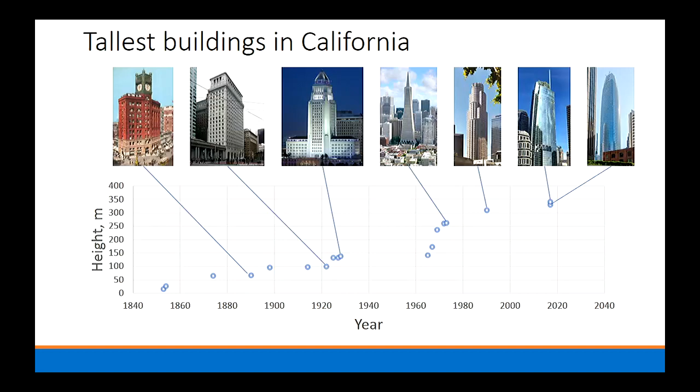Now, today we have tremendous power in computing, tremendous knowledge in the response of structural components that helps us design our buildings. We'll show some of that. If you go back into the 1930s and so forth, the designs were really based on very simple hand calculation kinds of methods.

I wanted to bring out an old book that sits on my shelves at home by Hardy Cross, on continuous frames of reinforced concrete. That's Professor Cross from the University of Illinois. He devised this method known as moment distribution.

How many of you have been taught the moment distribution method? Quite a few. I'm not sure whether in the classes today the young students are getting that method. It's a very powerful tool, a very powerful way of thinking.

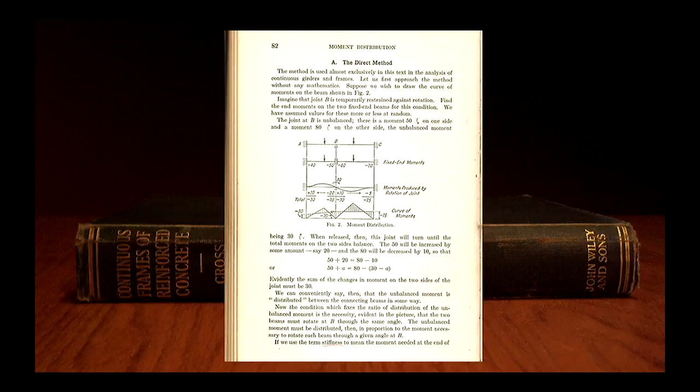So Hardy Cross really had a lot to do with being able to analyze buildings back in the 30s. He also had some other funny things that he wrote. This is another book that collects some of his writings from the 1950s, and the writings go back into the 40s. He wrote about standardization.

And what he wrote is peculiar. It says: as the size and complexity of projects increased, it became desirable and even necessary to set up a series of routine procedures for analysis and design.

And then his last sentence is very odd. Standardization, as a check on fools and rascals, or set up as an intellectual assembly line, has served well in the engineering world. Think about that one for a moment. It really doesn't portray us very well in structural engineering, does it?

First, there's the fools and the rascals, which is fun to quote. But the notion of an intellectual assembly line, where engineers with less training can produce engineering works efficiently and safely, doesn't sound right. But this was the thinking at the time. Standardization in our codes has helped us build safe buildings safely without the highest levels of training that might be possible.

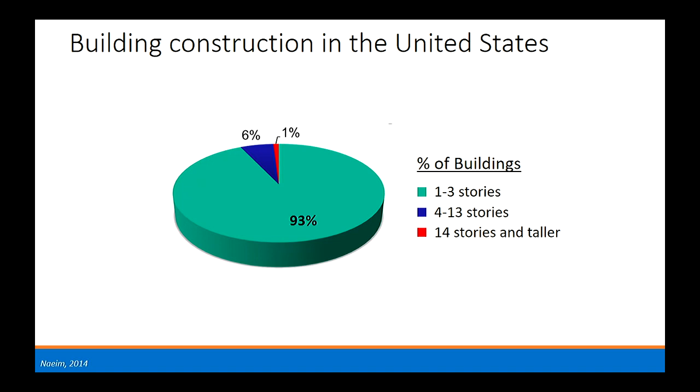And of course the standardized codes really aren't written for those buildings. You can't have an assembly line of engineers who are not so well trained designing them by reading a book. It takes something more, and that something more is where I'd like to focus my talk tonight. But don't forget Hardy Cross, a very interesting fellow — we can tell stories about him all night long if we wanted to.

These tall buildings have different dynamic behaviors than short buildings. This is a model of a 42-story building. Watch what happens — this is the displacement, these are the story shears. It reminds me of my grandfather's handheld drill, which is not a good image, but look at how the shear forces wiggle back and forth.

This structure is driven in shear forces by the second mode response, second translational mode of response. A standardized code procedure is not going to understand how that works really well, and it's not going to do a wonderful job in setting the design requirements.

What's going on down right at this level here? Well, that's the transfer level, where the tower comes down and enters into subterranean levels, and that's where the reaction forces, the joint of the building, so to speak, is. And so you get those big reverse shears.

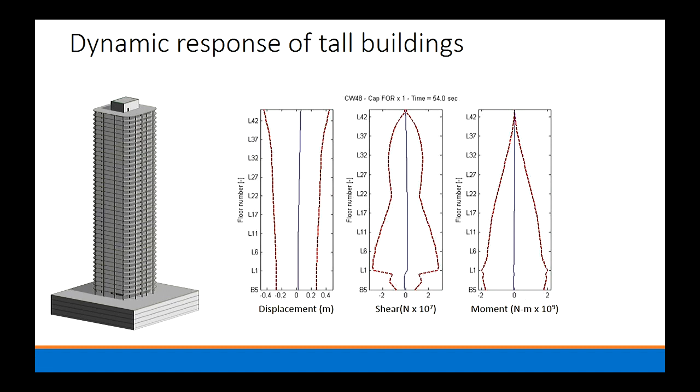So you need different procedures for the design of these kinds of buildings. These kinds of buildings are also specialized in that the framing systems are different from what the building code prescribes, at least in the United States.

In the United States, if you're going to build a tall building over 160 feet - how many meters is that? 50 meters - if you're going to design a building over that height and it's going to have a concrete wall for seismic resistance, it must also have a frame to go with it.

Now, the frame is there kind of as a backup system to provide a little bit more redundancy, a little bit more confidence that the system's going to work. But engineers began to challenge whether that extra frame is really necessary, especially if you're doing a good analysis and good design and good detailing.

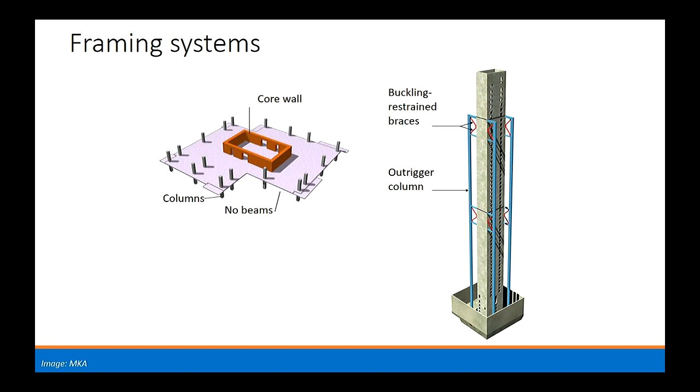And also that frame got in the way of the occupants of residential buildings having wonderful views of San Francisco. And you do get wonderful views of this city from these buildings. And so they began to explore the idea of taking away some of the framing and putting up structural systems that aren't in or are not permitted by the current building codes. And so that's another reason why you need some specialized procedures.

Going back to about 13, 14 years ago or so, in San Francisco was the start of designing these kinds of buildings completely outside of the code prescription. And for a while, it was the wild, wild west - if you're familiar with the cowboy shows from the 60s and 70s, as I am.

Engineers on one side of the street were doing something completely opposite of what the engineers were doing on the other side of the street. And one review panel would say, you're not allowed to do this. And the other panel, for almost an identical building, would say, you must do this. And it was confusing and difficult for the engineers and for the city to review these things.

And so we set out to organize practicing engineers and researchers to come up with some guidance and some consensus on how to design these buildings. So the Tall Buildings Initiative was started. Some guidelines were written to get us at least some organization, some usual design methods in place that would be repeated over and over again, so the engineer didn't feel as if he or she was sticking him or herself way, way out off the limb of the branch, so to speak.

More recently, the ACI Building Code, ACI 318-19, is just going through the final stages of being completed, should be out in June of this year. It has an appendix titled Design Verification Using Nonlinear Response History Analysis.

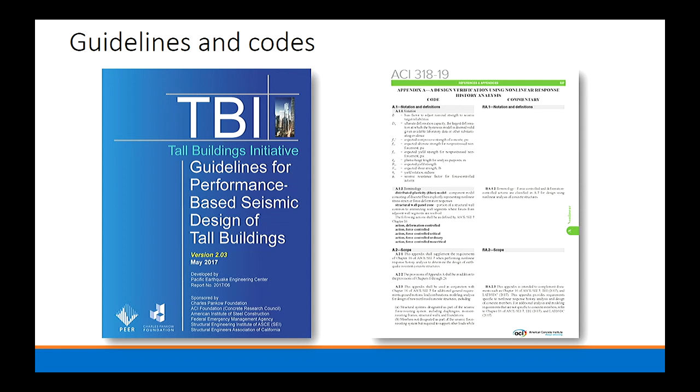But the idea from the building code is that the building official shall permit the design of buildings that use alternative methods or materials or ways of designing if it's demonstrated that the structural design as developed is not less in performance than buildings designed by the provisions of the code. So that's the escape clause that's allowed the design of these buildings to move forward.

And it's important to note, it doesn't say that they are better than performance of buildings designed by this code. It says not less than. And by and large, the design of these taller buildings is targeted at a performance level that's not less than the minimum permitted by the building code. It's not something special, usually.

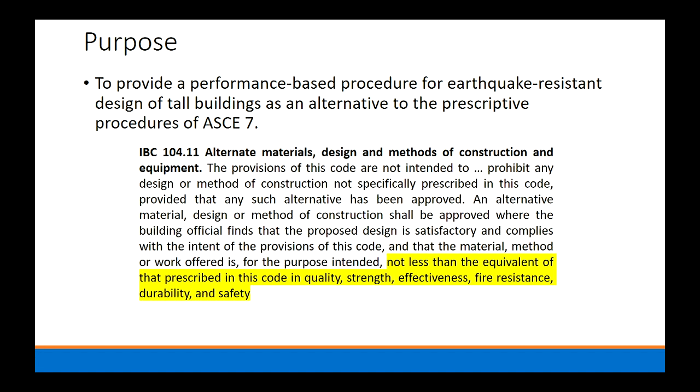The risk categories, as we define them in the U.S. codes, we get risk category 1. These are like barns, where your sheep live. So that doesn't require such important design.

Buildings number 3, if you've got very large economic impact or many occupants, might be a risk category 3. Category 4 is an essential facility.

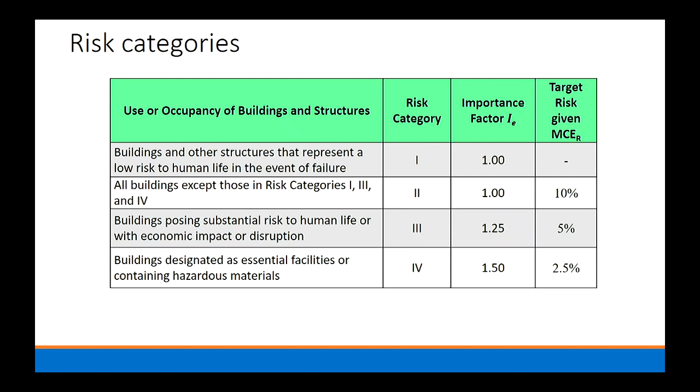Most of the tall buildings are residential or office buildings that aren't so big. They fall into risk category 2, and that's what most of the owners are targeting. One can, however, with these design procedures, determine that your building is important because there's a lot of people living in it, or the building's iconic, or the building threatens the surrounding neighborhood because it's so tall. And so it's possible to up the risk category and design for something better, but it's pretty rare.

And that's not my decision. That's just the way it is in design practice, in building practice.

When we design by the prescriptive methods, we always design for what we call the design earthquake in California. The design earthquake is about 2/3 of something we call a maximum considered earthquake. And we design at that level, which should provide enough strength that the building will be serviceable under some undefined earthquake, and it should have some reserve against collapse in some big earthquake.

But even though that's been the intent, we've never designed buildings for that until very recently. What we're usually doing today is setting aside the design earthquake completely, and designing the structure to be stable under MCE level shaking and to be serviceable under some shaking that's got a 50% probability of exceedance in 30 years.

And that 50% probability of exceedance in 30 years is defined by a response spectrum at not 5% damping, but 2.5% or less, depending on the building height, because these tall buildings tend to have lower effective damping and energy dissipation.

Some designers still start the design process by looking at the design earthquake. They're used to doing it. It gives them some proportions that they can lay out the shear walls and the other framing and get started, and then they set the results aside.

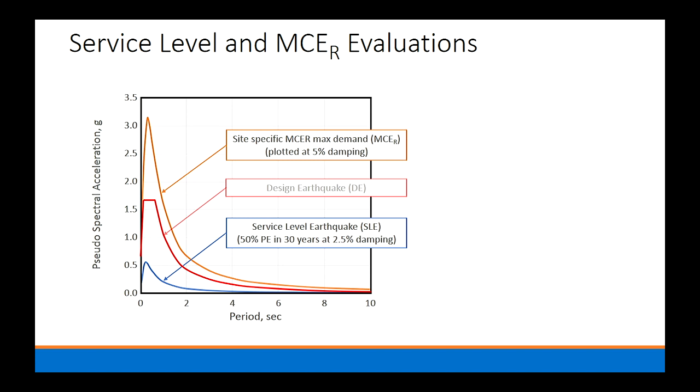In terms of seismic hazard analysis, I'm no expert at it, so I'm not going to spend much time, but it's worthwhile seeing what we do in terms of selecting ground motions and so forth.

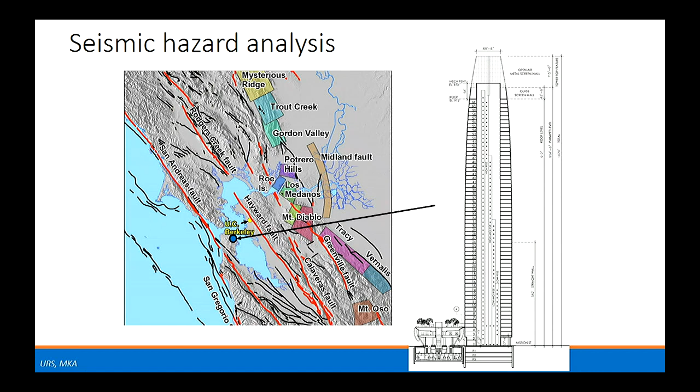Okay, so it's a very active environment, a very complicated environment. Engineering seismologists are always brought in to do a site-specific hazard analysis to assess what is the hazard level at this site. And generally it gets put together in terms of a uniform hazard spectrum, meaning the hazard or risk is uniform at every period around the range of the period zones.

And what's become very common in the design of these buildings is to identify predominant vibration periods for the structural system. You hope that you can find some predominant first mode periods and some second or third modes where all the periods kind of line up.

And then to define what's referred to as conditional mean spectra. The essence of this is if you are at period T1, you would like your response spectral ordinates that you're going to design for to be at the peak for this hazard level. But if you have a ground motion that gives you that peak, as you move to shorter or longer periods, the probability of also being way up at the uniform hazard levels is small.

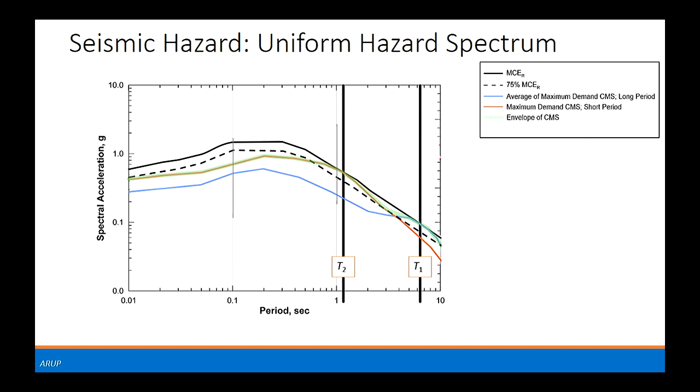In any case, we do not permit the response spectral ordinates to drop anywhere below 75% of what the uniform hazard spectrum is. So we make sure that this game playing doesn't result in ordinates that are too low.

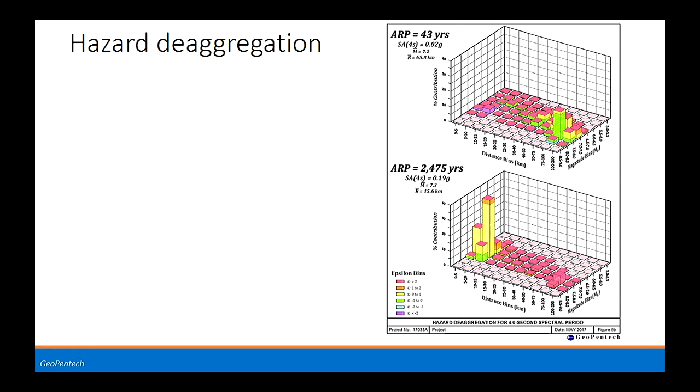The engineering seismologist knows what parts of the seismic environment contributed the most to that seismic hazard. So here we're looking at a 43-year return period service level and 2475, maybe MCE. You can find there are different distances and magnitudes that contribute most to the hazard at those different return periods, and at this spectral period of 4 seconds. That helps the engineering seismologist pick out ground motion records to use to test the building. So that's a fundamental piece of information that comes out of this.

The next thing to do is narrow down which of the earthquakes require large scaling—if you require a scaling factor that's too big, you throw those out. Which ones have the right duration associated with them? You can't use earthquake ground motion records that are 4 seconds long to test a building with a vibration period of 8 seconds. We also look at what records have the right frequency content in terms of impulsive motions. If you're near an active fault, there's a certain percentage of motions you'd expect to have an impulse, and you'd expect that distributed around your target period and so forth.

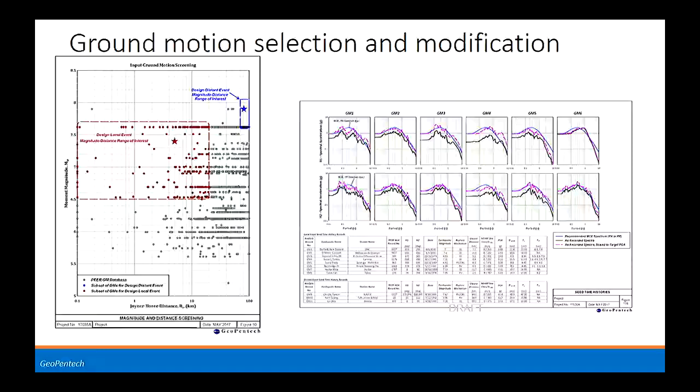I always read these reports and enjoy reading them, and I don't really know what to make of them, but I learn a little bit more each time. There's a great deal of care taken to select a set of motions that's representative and realistic.

We only look at horizontal pairs of ground motions—we never use vertical motion. Why not? No one's demonstrated its importance yet; we're working on studying that. We tend to use just 11 earthquake ground motions at any one period we're looking at. So if we have 2 conditional response spectra, we would have 22 pairs of earthquake ground motions that we use for the test.

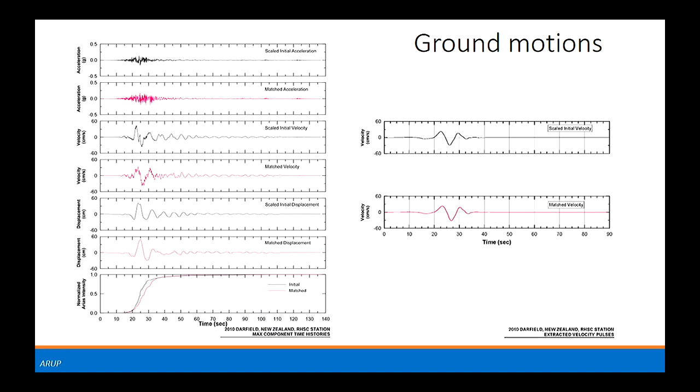Why 22? It's 2 times 11. Why 11? Well, you get a certain probability that you're going to be within 20% of your expected result when you use those records. The bigger the sample, the more likely you're going to get something close to the mean.

The buildings are of several types, but most of the buildings going up have a reinforced concrete core, and some of them have steel framing for gravity framing around them. Most of them have unbonded, post-tensioned, cast-in-place floors that are used for the gravity framing. And I bring this to your attention.

We don't have any hollow core slabs. And we usually have reinforced concrete framing. And even though we normally wouldn't include that as part of our seismic resistance, when we use these procedures, we model the resistance of all the parts of the building, including the gravity framing.

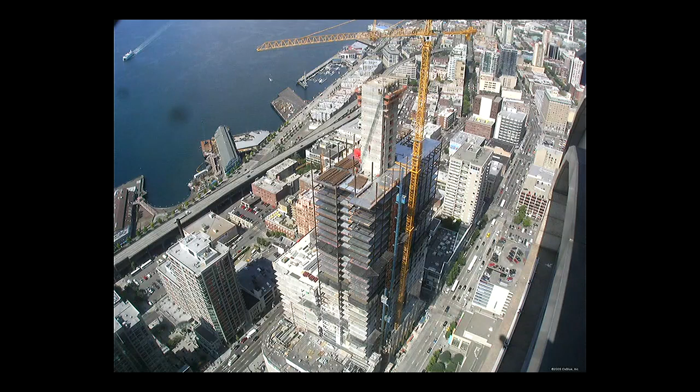So the typical structural model ends up looking something like on the left. The core wall is typically put together with fiber elements. We generally would have the slab to column framing represented with some approximations, with some outrigger beam column elements.

At the diaphragms, the transfer level diaphragms where the core and the tower goes into the basement, there's a tremendous force transfer. And how that force transfers out or in the building depends tremendously on how you model the stiffness. And so that stiffness is very carefully modeled.

We don't know how to model it, so we have bounding analyses that are required. You have to use twice what you think the stiffness might be, and maybe half of what you think it might be, and take the worst answer.

And then the elements that are expected to respond nonlinearly in most of these buildings, concrete coupling beams or composite coupling beams, the nonlinear model represents strength and stiffness degradation directly. And so that's part of the entire procedure.

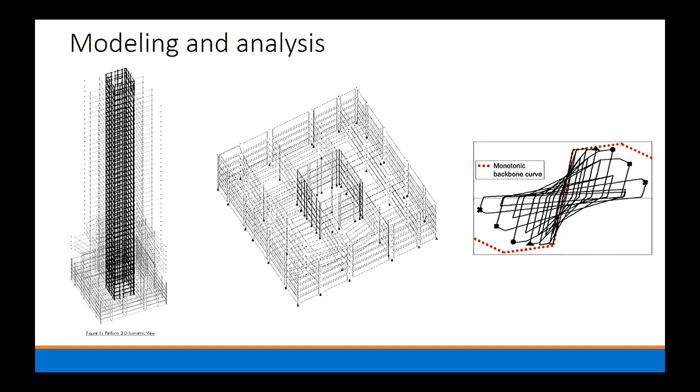And these things are pretty well calibrated to lab tests. We hope what goes on in the building is like what's in the laboratory. We're waiting for our earthquake to tell us. And I guess that is San Francisco's big gamble.

At levels where the tower changes into more of a podium structure, there are force transfers. Those levels have to be modeled in terms of their flexibility, and they have to be explored. And levels above and below that have to be modeled also, because how the forces transfer in and out depends on the local modeling.

If we have different kinds of walls, like this tower wall on a mat and a blade wall on a spread footing, then we model the soil foundation structure flexibility so we can tell how the forces transfer. Otherwise, a rigid base model is the norm.

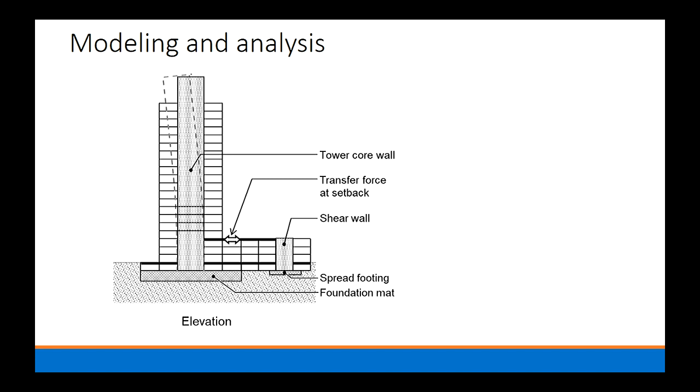The acceptance criteria go on for pages in the document, but it's boring to read those things. To illustrate, for this service level shaking, usually it's done with a linear elastic model, modal response spectrum analysis. We check that story drift ratios are not more than 0.005. Looks like total drift, but we're talking story drift.

We make sure that coupling beams and wall elements that might yield in the maximum considered earthquake shaking stay effectively in the linear elastic range. A little bit of overstress is permitted if it's a ductile element. That's the essence of the service level check.

When we get to MCE, this is the slide that could take the rest of the period, but we'll try not to do it. We select earthquake ground motions to represent the hazard. We build the nonlinear model. The mean of the transient story drifts that you get out of the 11 ground motions is not to exceed 3%.

The residual story drift is supposed to be less than 1%. And we don't want these tall buildings to be leaning in such a way that a city would close down the adjacent neighborhoods.

Deformation-controlled elements are generally allowed to rotate as far as the computer software will let them go, as long as the building stays stable. Many engineers restrict the rotations, though, to about 6%, such that it's pretty assured that you're not losing strength through cyclic loading in the element.

Strains are modeled. I don't believe the strain value is calculated, but fortunately, they're all really small. And that's a good thing.

And then when we calculate things like shear in a shear wall, that's a behavior for which we don't want inelastic response. So we call it force controlled. And those kinds of elements have to satisfy this load combination. So there's a dead load effect. So we've got dead plus some make-believe vertical component.

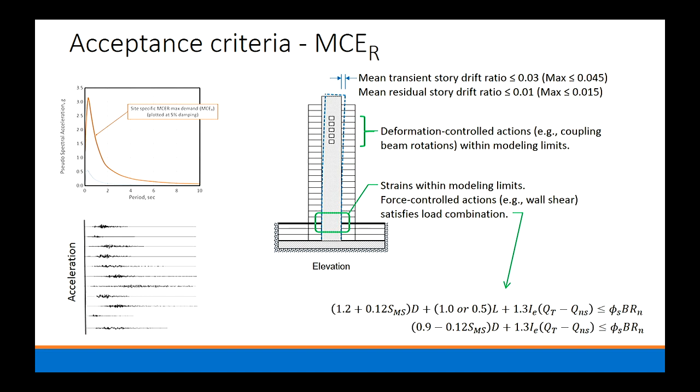That's in the risk category for a category 2 building. And if you get into a category 3, then this I-sub-E factor kicks in and you have to go more standard deviations above the mean. That has to be less than a strength reduction factor, which comes out of the ACI building code, times a nominal strength, which also comes out of the ACI building code, and then a factor that's been made up to reflect the fact that for some kinds of behaviors, the building code is conservative in representing what the strength is.

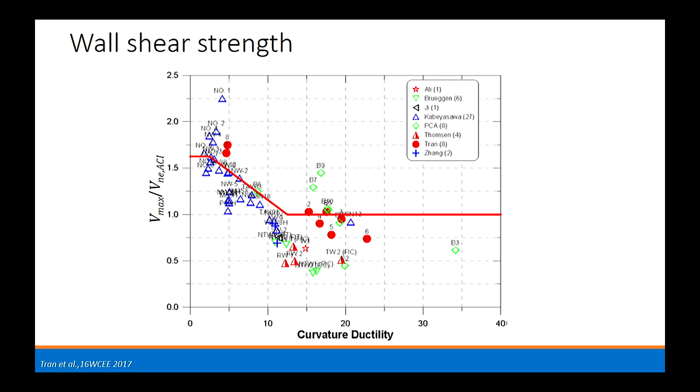Here's an example: wall shear strength. We know that the shear strength degrades and drops down to some lower value as the ductility demand goes up. It's typical of many kinds of concrete elements. Most of these core wall buildings have very, very low ductility demands, so it's permissible to take that overstrength into account through that factor when you're doing the design. It's routinely done these days.

And that's now been adopted into the ACI building code Appendix A without touching it. I was surprised. There are other things you could check, but that we don't normally require as part of the design. You could check non-structural components using the accelerations that you get from your nonlinear analysis, but most engineers just use the building code requirements for tying things down.

You could worry about your neighbors. For example, this tall building is sitting right next to the Bay Bridge. You could spit from the 4th or 5th floor and hit the bridge, it's really close. So we want to be sure, and we include in the guidelines that the cladding doesn't come off, right? You want your cladding to hang on the building like the scales on a fish. When it moves, you don't want the scales coming off of the thing.

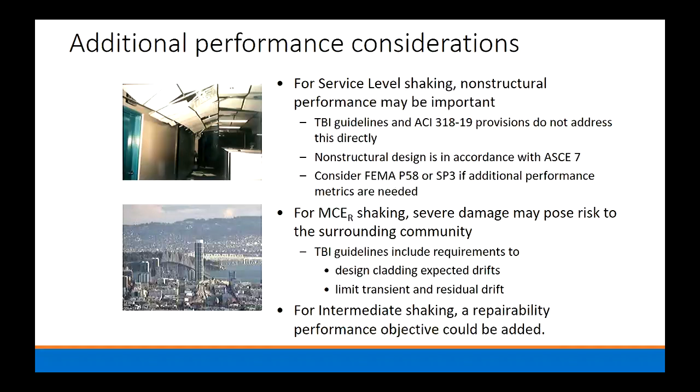And then the transient drift and the residual drift have to be controlled more so than conventional buildings. For intermediate shaking, you could consider a repairability limit state, but it's not being done today. Ken and others held a workshop on repairability. That's where you plug into this methodology.

Transfer forces are very carefully monitored through the review, because most practicing engineers are not really good at understanding how diaphragms work in the US, and maybe not in other places too. Getting this transfer force taken care of properly is critically important for these buildings. This collector in a tall building in Los Angeles had so much steel that if you were to take all the steel in the collector and put it into a square, it would be 0.4 meters by 0.4 meters, grade 400 steel. So huge forces getting dragged around in these buildings.

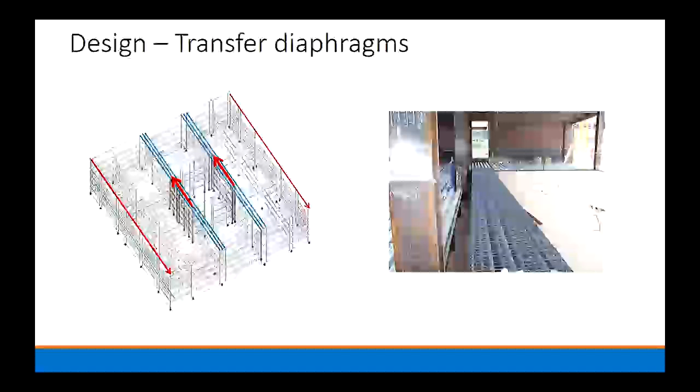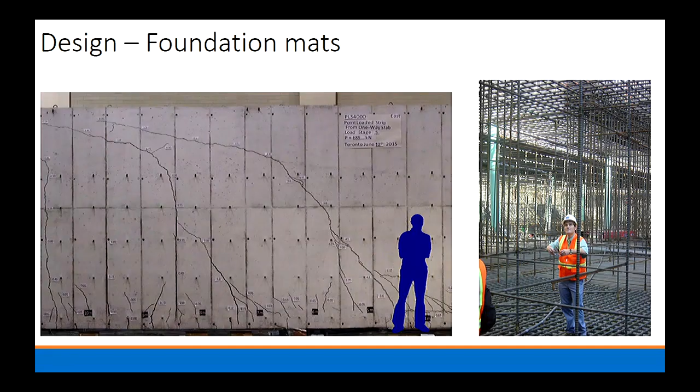Design of foundations: I still teach my undergraduates that you make the foundation thick enough so you don't have to put shear reinforcement in it. I tell my engineers that I'm peer reviewing, you put shear reinforcement in there because we know that there's a size effect, that the unit shear strength drops down to about 40% or so of what the strength is from a thin element if you have no shear reinforcement. And so these things are all being built, and have been for the last 15 years, with shear reinforcement. And I'm proud of that one.

The gravity framing is typically unbonded post-tension construction, and the typical design puts in what we call stud rails, so there's shear reinforcement around all these connections. I remember Professor Park doing tests, not quite on stud rails, but on slab column connections, looking at shear reinforcement and so on. It's done routinely in these buildings because even though you don't rely on these for seismic resistance, you can't afford to fix them all. And if you don't do this, those are the elements that we calculate are damaged and cost the most to repair.

And then there's design and design review. You need a savvy owner who talks to a building official, and the building official has to permit this kind of a process. The design team has to know how to do it, and I know there's many engineers in New Zealand who would know how to do this. And then you need a review panel that's willing to judge whether or not the engineers are singing a good tune or they're not singing a good tune.

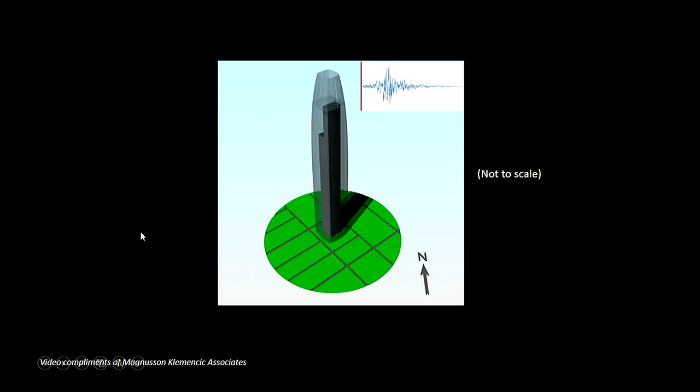So here's a model of the Salesforce Tower under one of the earthquake ground motions. And by the way, I have to thank Ron Klemencic from MKA who provides a lot of this material. But you can see how the higher modes are driving this building initially.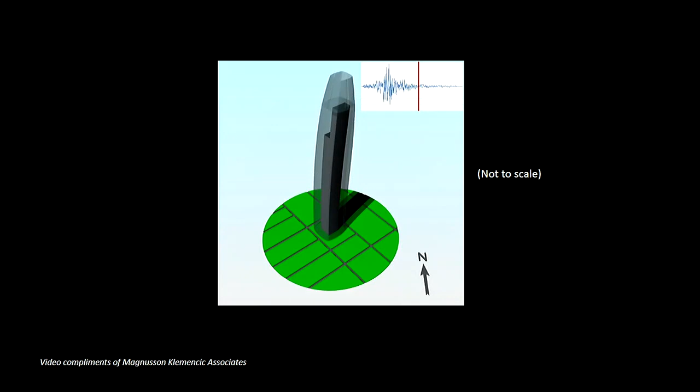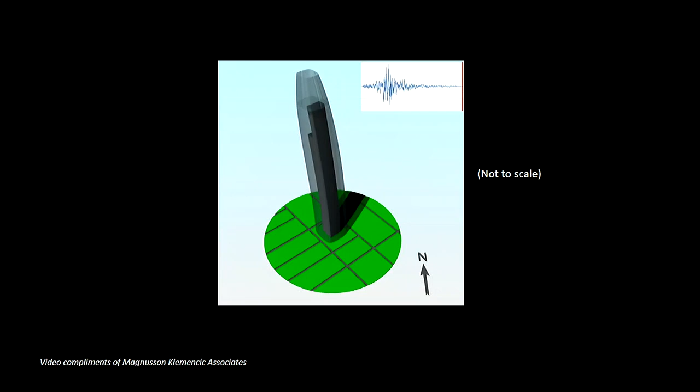And eventually, as the ground settles down, the building settles into a simpler sway mode. It's predominantly first mode. This is not to scale, although the movement is over 3 meters in a building like this, up at the top. And you really try to avoid having buildings that twist, because if you've got somebody up in a tall building and the building's twisting, they're not going to be feeling so well.

Performance verification in a typical tower. Here's from the Salesforce building. Here's where we would limit the shear stress. We know we can deliver that much shear strength in these buildings easily, considering the demands for flexural ductility are really low. And they check out pretty well.

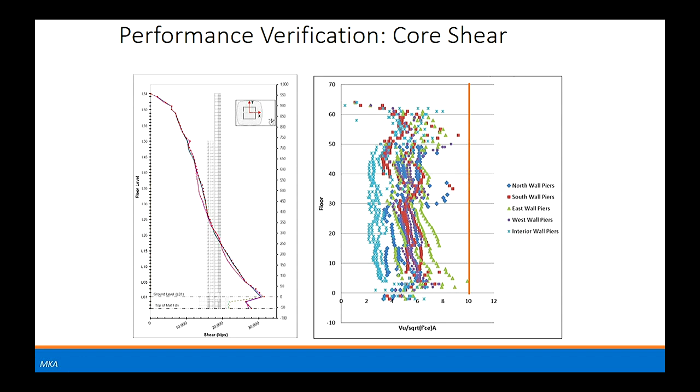But these checks are routine as what we do. We check core wall calculated longitudinal strains. Again, I don't really believe them so much, but look, here's 0.003, which I think is a fairly reliable compressive strain capacity without any special confinement. These walls never get close to it. And so it's pretty unusual to drive the walls hard in compression, and that makes me feel good.

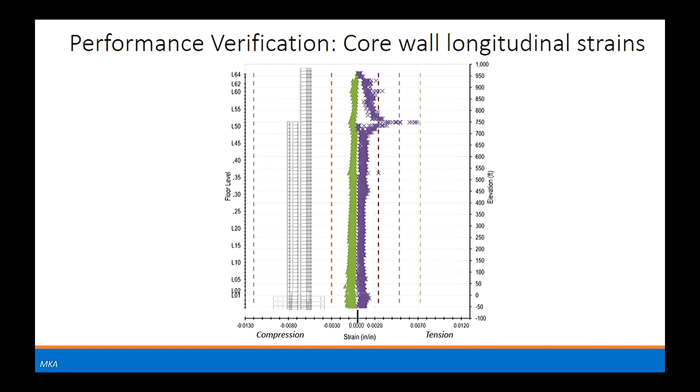Tensile strains, usually you get up to yield, but not too far beyond that. This building, look, up at the top, where they have the setback is a problem area. And so the engineers have to put additional confinement up there. And they know that because they're doing this kind of analysis.

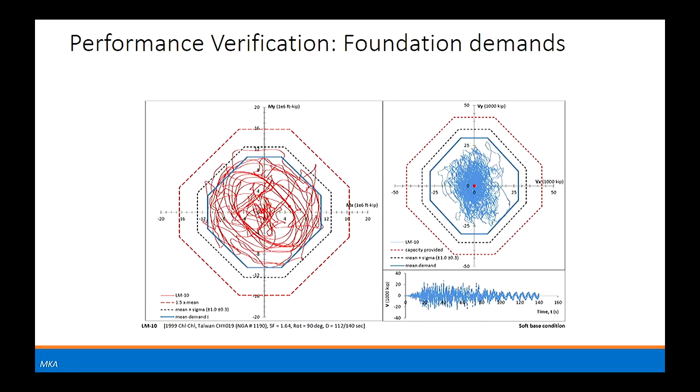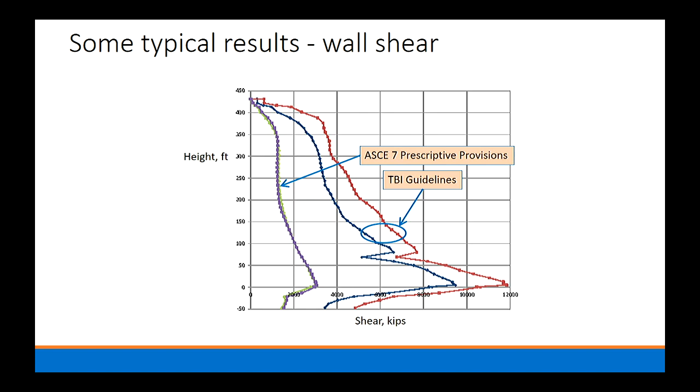What do we learn from all this? Well, we learned what you in New Zealand have known for a long time, and we read your papers and we know it too. We've never been able to get our building codes to recognize it until this year: that the shear forces that you get in the core walls is much greater than the forces that you calculate from the linear analysis, by a factor of 2.5. And we've known it, but until the 2019 ACI code, we were unable to get this in. The design of these tall buildings, I think, pushed the code writers over the edge finally because everybody knew it was an open secret. So that's one of the things that happened.

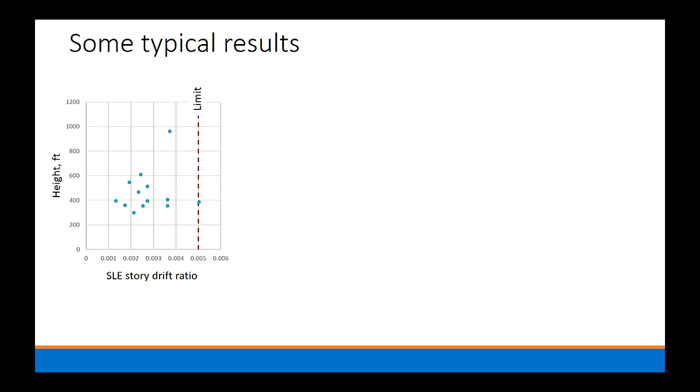Here's a sampling of building projects I've worked on. What kind of story drifts do we typically get? They're typically well within the limits. So in terms of service load behavior, likely to be pretty good. At MCE loading, we're pushing close to the 3% limit on some of these buildings. But again, bear in mind the shear stresses are within limits. The strain demands are pretty low. They're drifting this far because they're so tall.

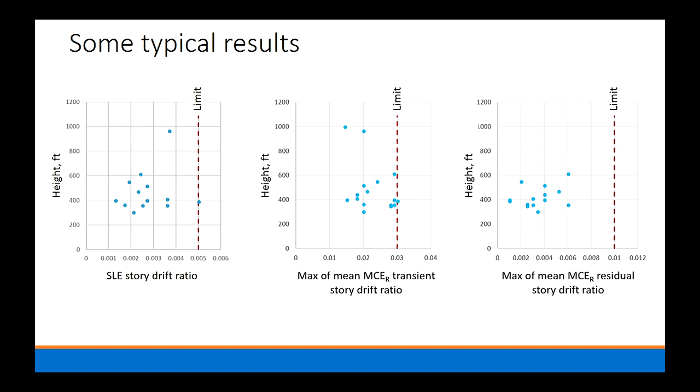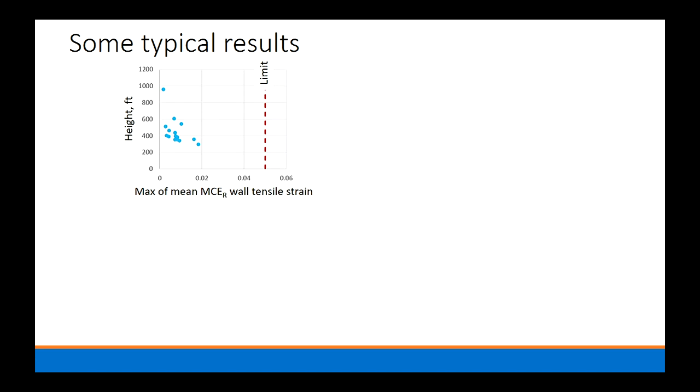Residual story drifts, pretty low. Do we believe we can calculate these accurately? No. But again, at least we consistently find the numbers are low and there's reasons for it. The inelastic response demands are pretty low. Wall tensile strains, always low, not worried about fracturing. Compressive strains, there they are, barely need any confining steel, but we put all that steel in anyway, just in case we don't know what we're doing.

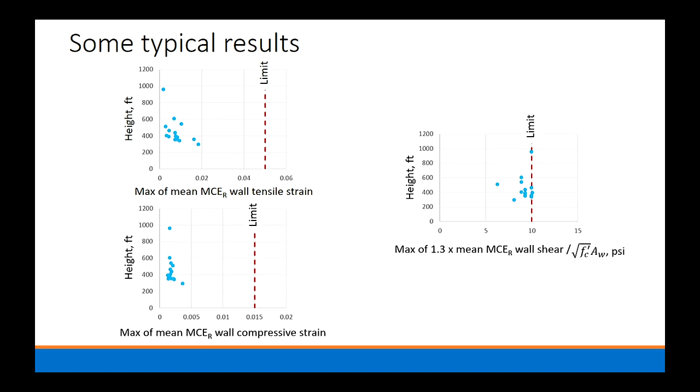Wall shears are always right up at that limit, always right there. That's what controls these buildings. Coupling beam rotations, they get close to this limit of 0.06, which is where we start seeing strength degradation in diagonally reinforced beams. And this is what they'll look like, I think, based on lab tests.

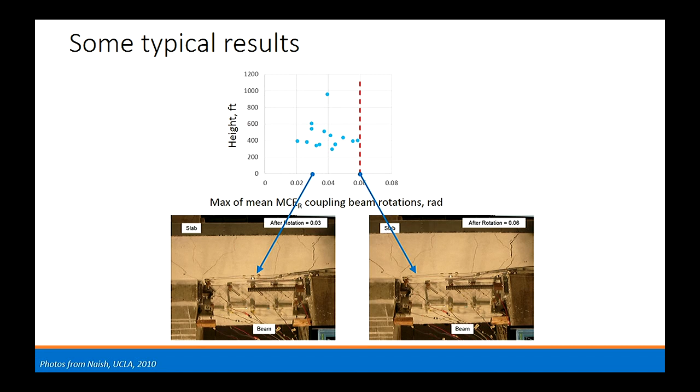In this MCE loading, they will be damaged. There'll be cracks to fix up. Will the building have to be replaced? Time will tell. We haven't looked at that. Great subject for Ken working on his repairability topics.

Let's see, going the wrong way here. Okay, so this sort of gets me just to a comment about the resilient city. And I've had an interest for over a decade in this resilience topic, and I'm not going to go deep into this today because I don't have the numbers to tell you about.

But San Francisco is very interested in being more resilient than it currently is. And there's been talk about a resilient city for some 10 years now. In fact, at a New Zealand earthquake conference in Christchurch, I gave a paper on this in 2009. And there's thoughts: well, where are our buildings in terms of their restoration time, given what we currently have for the inventory of our buildings? Not very good. We're talking about months and months and months to get people back in their homes and in their businesses.

We'd like to get back to something closer to the left. And that requires us to design new buildings, especially these tall towers, to be really resilient. So that on average, taking the existing inventory and the newer buildings together, we'll have places that people can stay and be housed. And if people can stay and be housed in a city, then I think the city's got a chance to survive and recover from the earthquake.

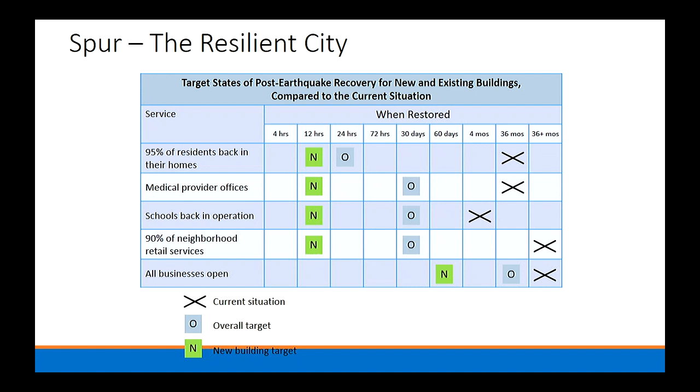I think the numbers we're getting from these design procedures and calculations are suggesting we're on track with these tall buildings. But you don't know what you don't know, right? I think we all learned that in strong earthquakes, and we're way overdue in California for a strong earthquake. I wish we'd have that earthquake before we built too many more of these things, but this is the way it goes.

I'm always impressed to see one of these buildings go up. I'm an academic, but I really am interested in the practice of engineering and earthquake engineering, and I enjoy seeing a building go up. So let's take a look at what one of these looks like.

So we start down at the ground. By the way, those of you debating going to Stanford versus Berkeley, that's a Stanford engineer. We don't know whether he got out of there or not.

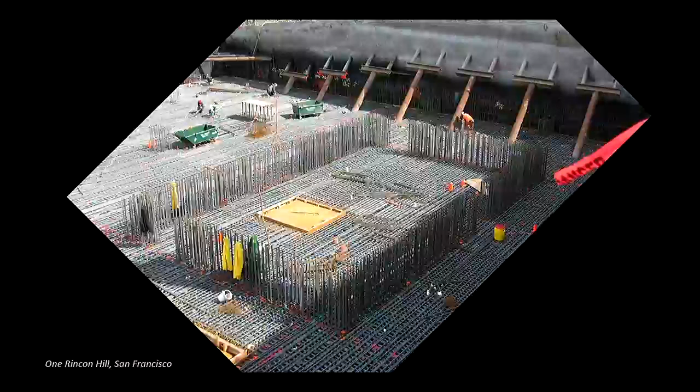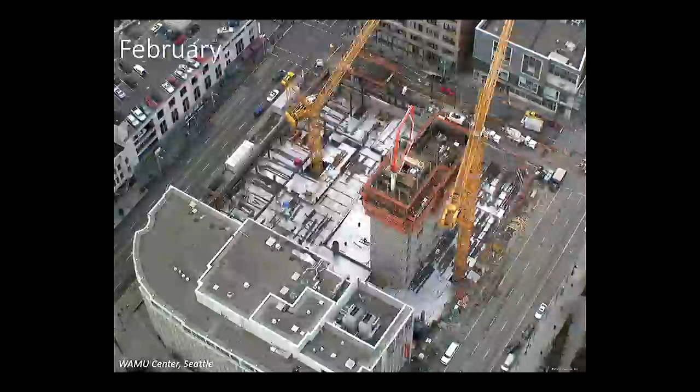Let's take a look at a building from farther away, and month by month, look at how the construction goes on a typical tall building. So there's a core, it starts up and goes up. Look how tall it's getting. And right about now, it begins to feel like, oh my gosh, let's get the rest of the building up there so that it can support this very slender, skinny tower.

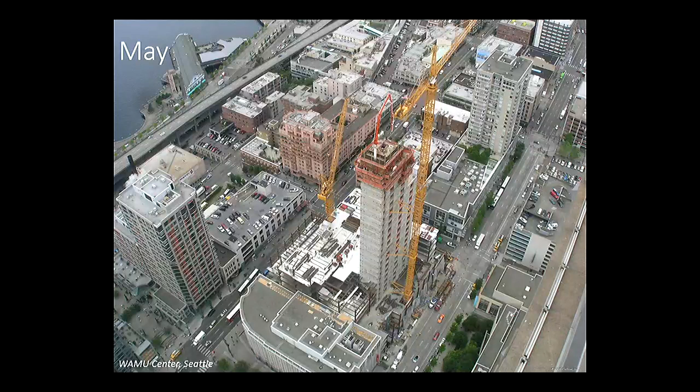It's not how it works. The tower is supporting the rest of the building, right? So this is the building at its best. But it's usual to slip form these towers so that you get one crew working on one thing, and then the other crews start following. So you get multiple crews working on different floors at the same time. The flooring starts up, and the tower's getting taller.

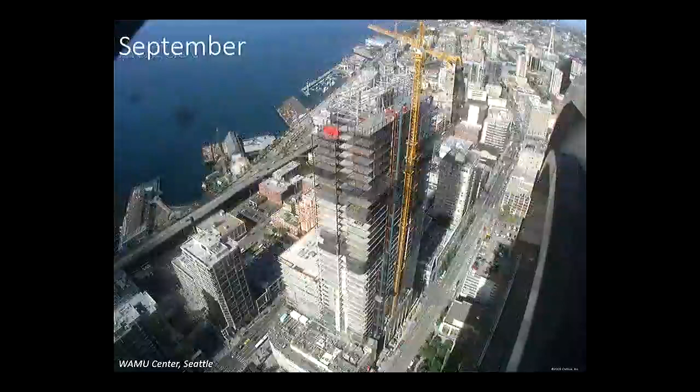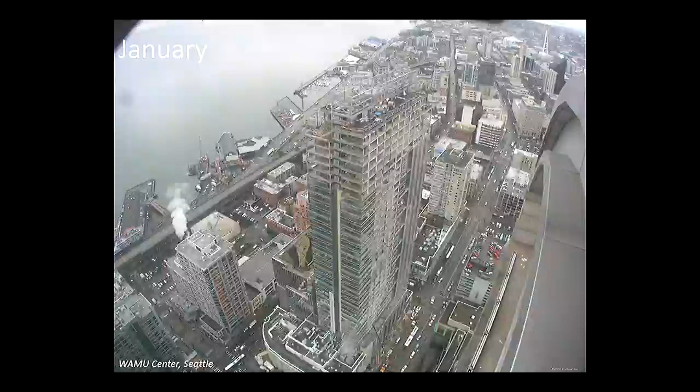July, August, September, they're starting to put the cladding up on the outside, the scales on that fish. November, December, January, February, and March, and there it is. So that's how it goes up over the span of a year to a year and a half.

The design and review process might take a year. Most engineers promise the owner, oh, it's 6 to 9 months, but sometimes it takes longer because these reviews are done very seriously. These are serious buildings.

And I like the idea of these buildings, not because I want to build on everything, everywhere, and have buildings and buildings and buildings, but I think these are centers in our cities where people can live and have fun. They don't have to drive from the suburbs or drive back to the suburbs after work. They can stay and live in a good environment close to where the action is and enjoy life, and not be stuck in traffic, some of which I was surprised to see also here in Auckland in the last few days.

So here I conclude the presentation. This is how it's being done right now in California and up and down the West Coast, looking at designing tall buildings in a way where we're doing our best to understand the mechanics, doing our best to make sure that the structures being built, even though we're calling them risk category 2, are designed well within the limits. So I think they'll help us have a resilient community after the next earthquake. But rather than leave you on that very, very positive note, the next earthquake will tell us whether we're actually doing it right. Thank you.